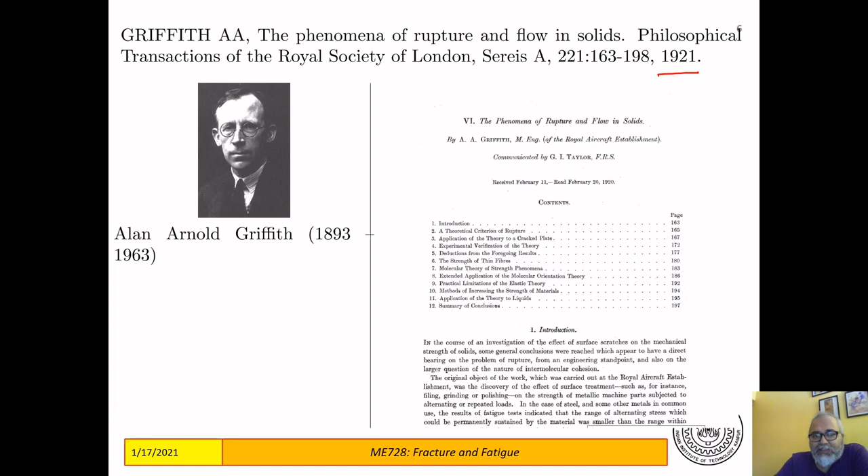Now, Griffith's idea of fracture was based on very simple premises. Imagine you are conducting a uniaxial tension test where you apply a force in the axial direction to a bar which is very long in one direction, with a cross section small compared to its length. Under application of this force, the bar will deform and elongate in such a way that its total potential energy is a minimum.

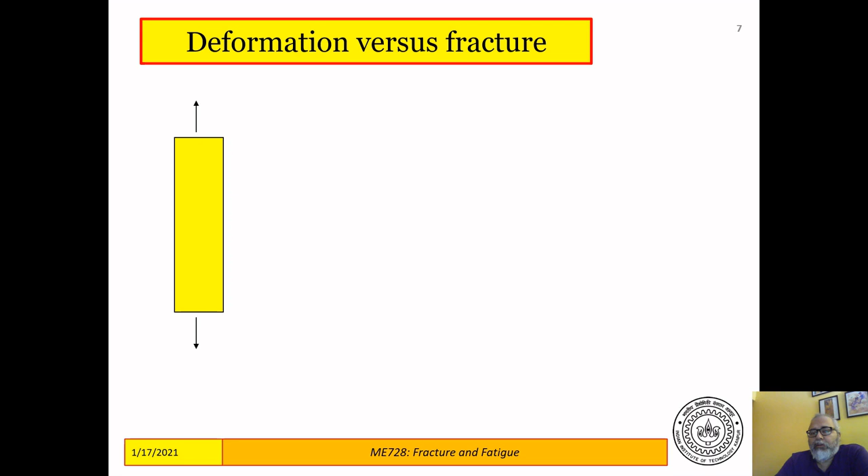Griffith suggested that this bar, instead of deforming, may form a crack if the energy required to form a crack is less than the energy required to deform it without forming a crack. Energy required to form a crack means two new surfaces have to come up inside the material, and formation of these two new surfaces requires some energy. So the energy required to form these two surfaces has to be less than the energy required to deform, in order that the crack can be formed.

So his explanation was an energetic explanation, which said that it is energetically favorable for a material to form a crack than to spend energy deforming without forming a crack. If that is the situation, then a crack will pop up inside the material. This is the basic understanding even today: a crack will form whenever it is energetically favorable for it to form, whenever the energy required to form the two new surfaces is less than the energy required to deform the structure.

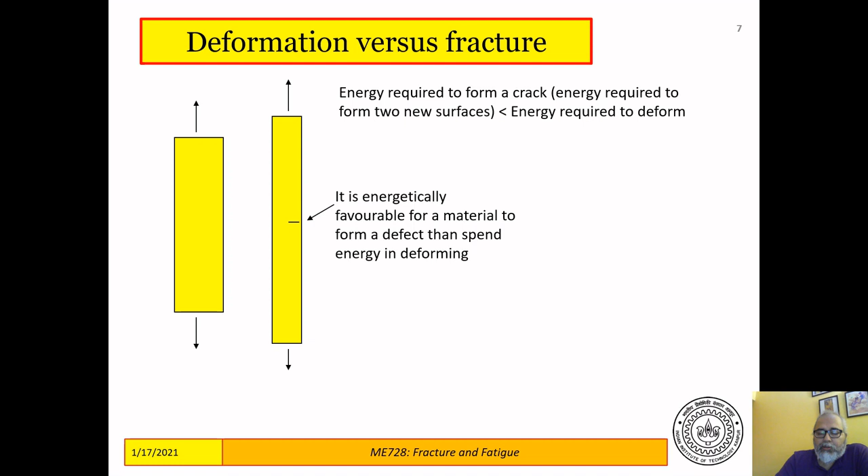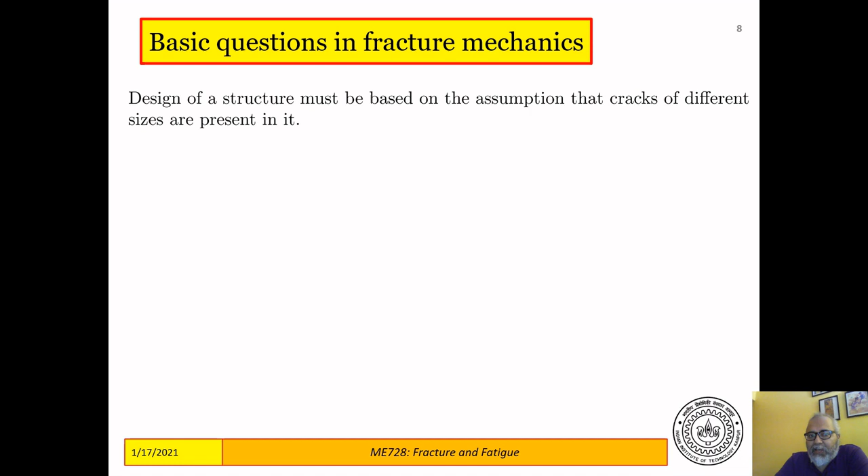In fracture mechanics, we deal with a few basic questions, and these rely on the assumption that every structure has defects of different sizes present in it. You do not have structures which do not have defects; however small they might be, there are defects all over the structure. This is the basic design principle that design by fracture is based on.

Now, the question is, of all the cracks that exist in the structure, will one grow catastrophically, or will all the cracks remain dormant? If all the cracks remain dormant, I don't really care, because it's not going to fail the structure. But if there is one crack in some location able to grow catastrophically, then my structure fails, and I have to be wary of that situation. So if there is one critical crack that can grow catastrophically, I have to further ask: how fast will it grow? And will it keep growing, or will it stop? Fracture mechanics tries to answer these three questions.

Given a set of cracks, fracture mechanics can tell you whether one or more of those cracks will grow. It can also tell you how fast it will grow, and it can help you design strategies that can be used to stop it from growing.

What you will see here is that fracture mechanics basically assumes that defects or cracks are already pre-existing in the structure, and it does not question how those defects came about. So to begin this course, I thought I should give you some idea of how these defects, on which we are going to apply our fracture mechanics, can come about. What I'm going to say is not exhaustive, but these are some of the important ways in which defects appear in structures.

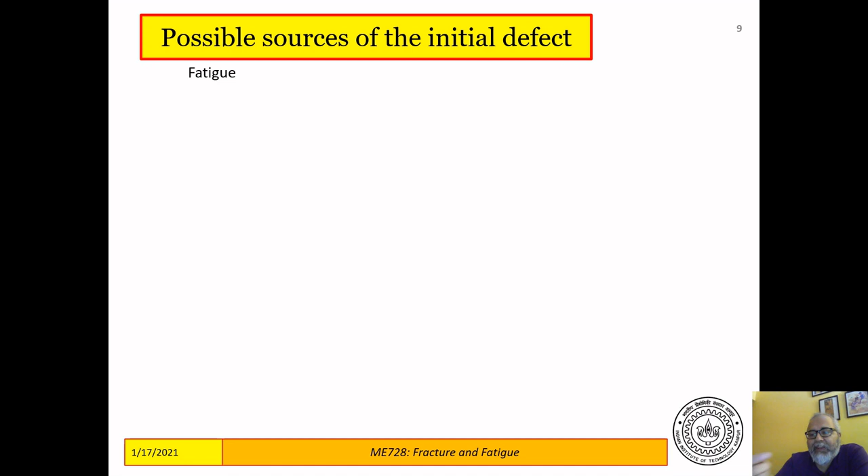So fatigue is one major source. Fatigue, or long operations over cyclic loading, is one of the major sources of the initial defects that ultimately lead to failure of structures. The second major source is aggressive environments.

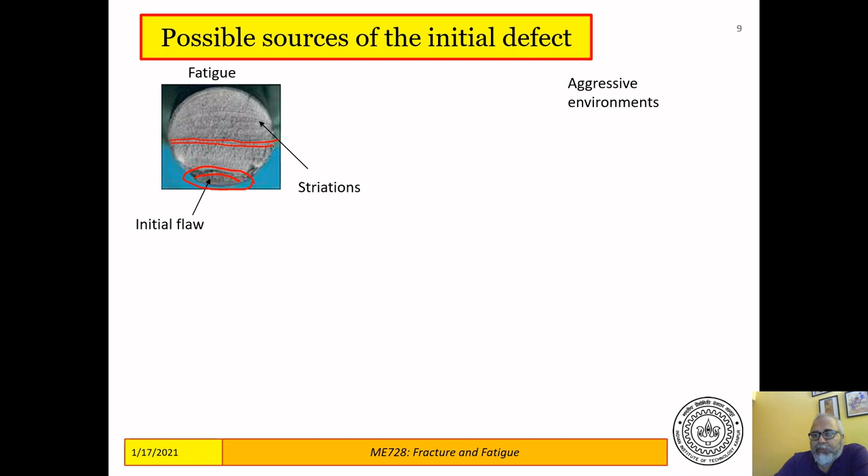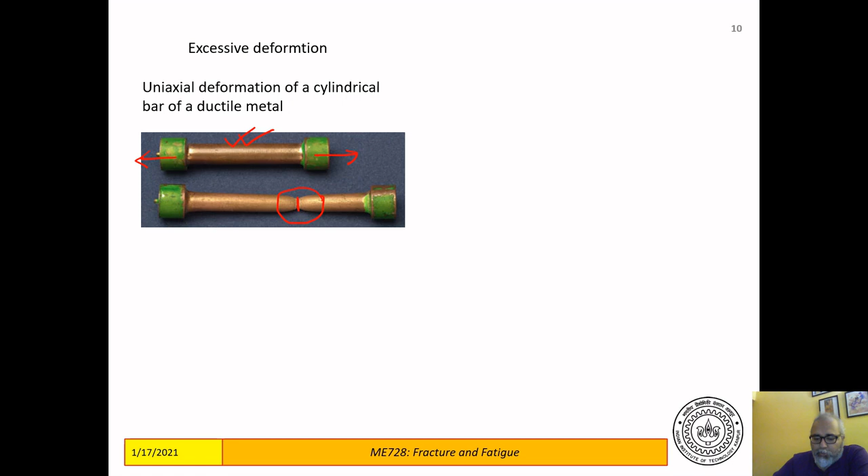So this is the neck, and then it cracks along the neck, it breaks along the neck. This is the experiment that every undergraduate student does in order to obtain the stress strain curve of steel or aluminum, some ductile material. Now if you look at this neck part carefully...

You will see that the two parts form what is known as a cup and a cone. So this part forms the cup, which is actually a depression, and this part forms the cone, which is actually a small hill. So these two fit together. Now if you look at the top view, if you look from here...

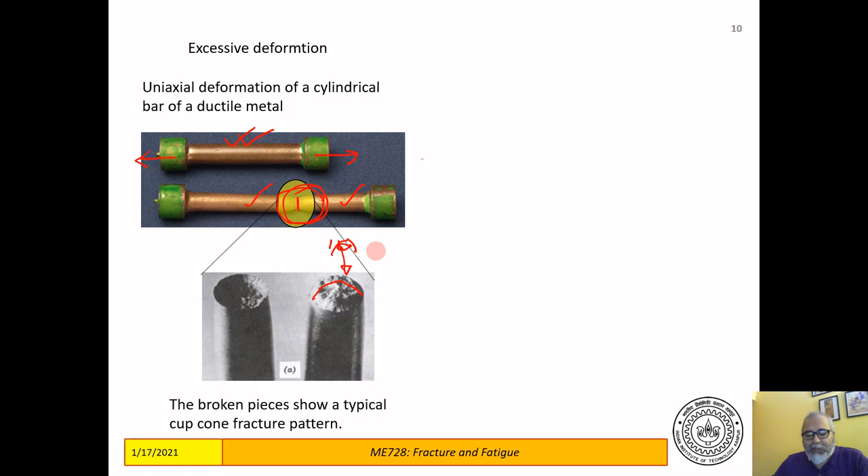Under a microscope, if you look at a small area here, what you will see is a structure like this. This is a typical example of a dimpled structure, very typical - I will show you another example - which is a hallmark of ductile failure. So this is a ductile material, steel, aluminum, copper, and this is a typical close-up of a cup and cone fracture. If you looked at the cone, or if you looked at the cup, you would see more or less a similar kind of picture.

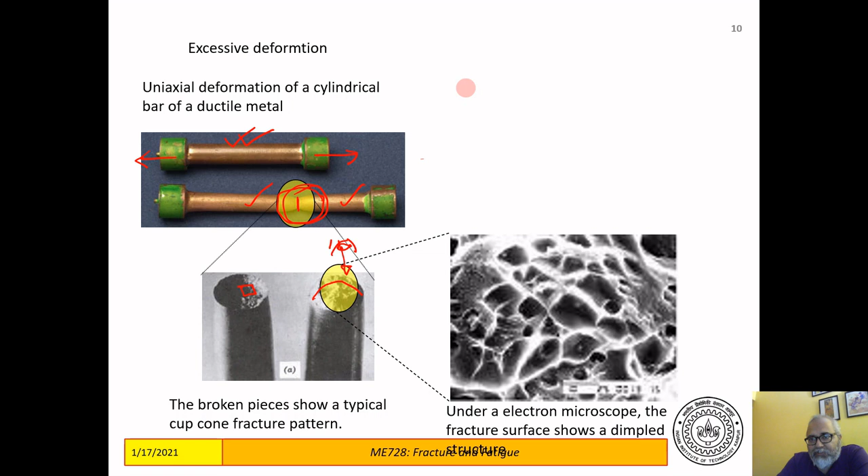These are actually signs of early defects that caused the failure. People have looked at this. What people have done is taken a dog bone, pulled it to some extent, cut it across and looked at the surface, then taken another one, pulled it some more, cut it, looked at the surface, and doing this they have pieced together how this particular process happens. It happens along this route: you have the start of necking, which is an instability phenomenon, in this region, as you're pulling like this.

When it starts to neck in this region, the stresses are very high, which gives rise to microscopic voids. These are very small voids. Then some of these voids are actually represented by these dimples.

So these dimples are depressions. The black parts are away from you, the white parts are towards you. So you can imagine this is like half of a hollow sphere, and the other half would be somewhere on this surface. So these two would fit to form a complete sphere, which are the signatures of these voids that have formed.

Then some of these voids might coalesce to form a bigger defect, and then this bigger defect, if it's big enough, can grow, can propagate. That's where fracture mechanics comes in and causes failure.

So this is the initial defect from which fracture mechanics would start to operate, but this defect comes through the formation of voids: void nucleation, then void growth, then voids coalesce, and finally a large enough coalesced void would propagate to form a crack which will lead to failure.

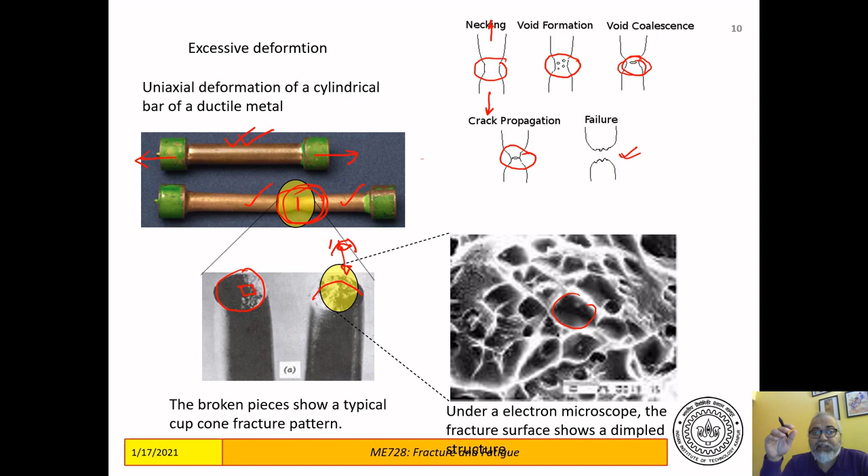Now, there are some inadvertent ways in which the defects come about, and they have to deal with poor design and manufacturing processes. So your design may have stress concentrators, which would be regions of very high stress where defects can form.

Poor material selection might lead to defects. Defects may be induced by the manufacturing process itself, cutting or forging or improper heat treatment, and defects may also result from faulty assembly of components. So these are some of the inadvertent ways in which you can introduce defects in a structure.

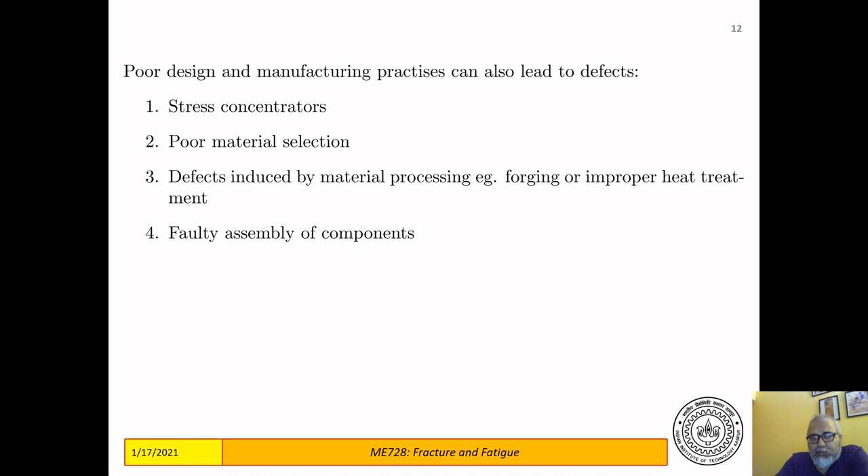And let's look at a case study taken from this paper, and this is on the axle of a railway.

So we need to know, as I said, what is the size of the defect that we will start from. We are not going to look into how the defect came about, but we need to know what size of initial defect we are going to consider.

Now, the size of the initial defect will be determined by, and this is a design practice, the smallest size that you can detect with the inspection methods that you have at your disposal.

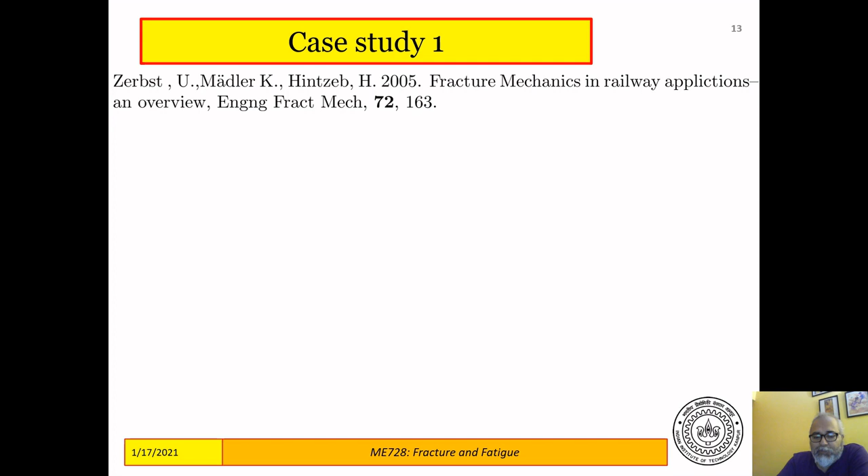For example, in this railway application example, these are some of the processes. You don't need to really worry about what these processes actually do. These are some of the processes by which you detect cracks in a structure. So you have these railway axle, wheel axle assemblies, and there you use one of these methods to detect whether it has a crack or not.

And each of these methods will have a resolution. That means there would be a smallest size of the defect that it can reliably detect. For example, if you take ultrasonic testing, then the probability of detection is almost 1 once the crack size reaches a depth of about 6 millimeters. So anything above 6 millimeters would be definitely detected if you are doing ultrasonic testing.

Now, in that case, when I do a fracture mechanics based design, I should always assume that there are defects of size equal to or less than 6 millimeters in the structure. So that's the starting point of my fracture based design.

If I do something better, like magnetic particle inspection, then I have a 100% probability of detection if my crack is, say, like 3 millimeters. And in that case, I have to assume that the structure always has cracks of size 3 millimeters or less in it. And then I have to ask those four questions: whether these cracks can grow, how fast they will grow, whether they can be stopped, and so on.

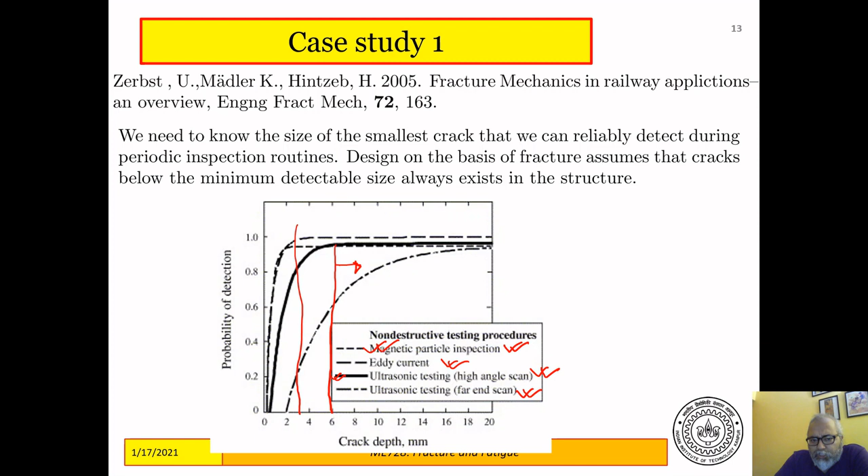In conventional design that we have learned in our undergraduate days, the basic premise is that we have to design in such a way that everywhere, the stresses at any point in a component does not exceed the yield stress. So stresses cannot exceed the yield stress, or some combination of stress like the von Mises stress or the Tresca stress, based on some criteria, should not exceed the yield stress.

Fracture mechanics based design asks a different question. It asks, assuming that there are defects in the structure, what is the load at which this defect will start to grow? That is my limiting load. Whereas in conventional engineering design, which is also called yield based design, the load should be such that it does not cause yielding at any point in the structure.

If, for example, your detectability limit tells you that the cracks are of this size, then fracture will not happen, and your structure will fail according to the concepts of fatigue and yield at the endurance limit of the material. So it will fail at the endurance limit. If your crack lengths are of this size, then it will fail under linear elastic conditions.

That is what we are going to learn next. LEFM means linear elastic fracture mechanics. So it will fail in this region, without causing much plasticity in the material. It will fail according to linear elastic fracture mechanics conditions, but that you see is much lower than the endurance limit.

For the endurance limit to be valid, for the material to fail by yield, your crack lengths have to be smaller than this. If your crack lengths are bigger than this, you will fail by fracture, but fracture will not cause much plasticity. Whereas if your crack lengths are in this region, you will again fail by fracture, but you will cause EPFM, elastoplastic fracture mechanics, to come into the picture, and your crack propagation during failure will cause a lot of plasticity.

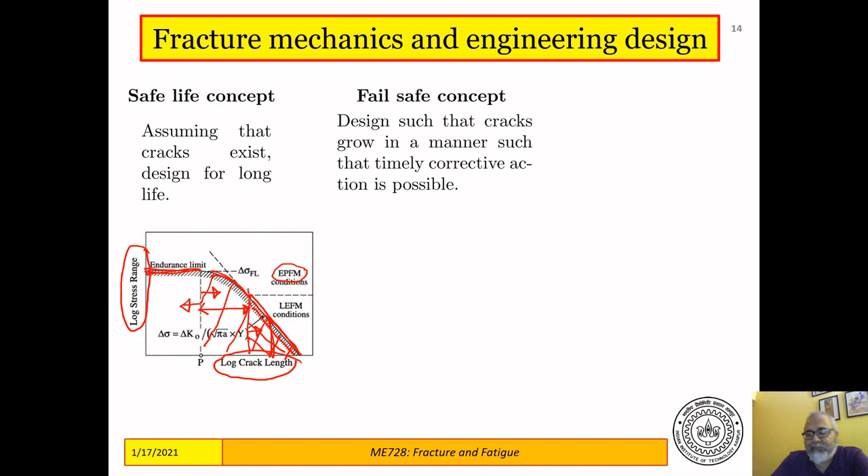The fail-safe concept suggests that you design such that cracks — small cracks below my detectability limit — are allowed to grow, but in a manner so that timely corrective action is possible. In other words, let the cracks grow slow enough that I can detect them and take corrective action. This is the concept of fail-safe, fracture-based design.

Another variant is that small cracks are there, they also grow, but whenever they try to grow, I sort of guess where they are trying to grow from, and then I try to arrest the crack, to stop it from growing before it causes complete fracture. I can do this by modifying the material I'm going to use, and also by clever design of the structures, by adding what is known as crack arresters, which are present in several structures that you see around you.

So these are the three major concepts of design based on fracture. There's of course another brute force kind of concept, which is the damage tolerant concept. Here you do nothing, but you just do routine maintenance tests, overload tests, and remove cracks as when you see them.

You either patch them up or fill them with something whenever you see them. So this is kind of a brute force approach, which we are not going to talk about much, but a lot of the industry probably uses this. We are not going to talk about this. Our concepts would be like the safe-life concept — so how can we limit our loads so that cracks never grow.

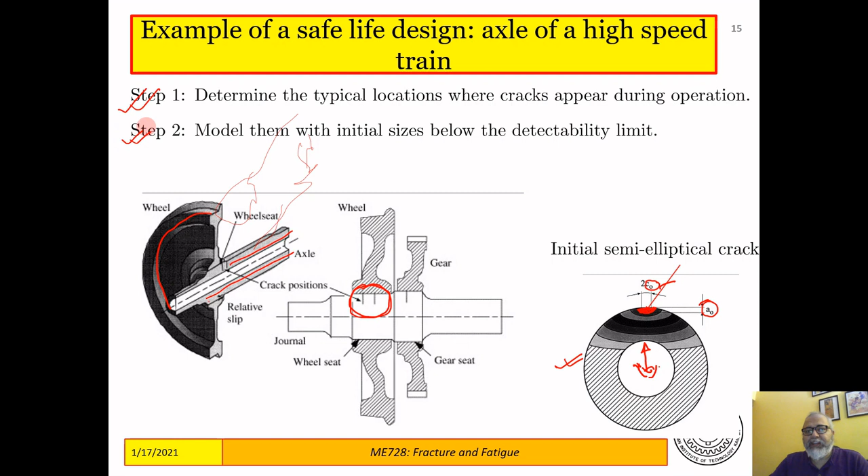Now I can do this to wheels as well. So the second step is to model them with initial sizes below the detectability limit. The next step is to consider physical conditions that the crack might be subjected to during operation.

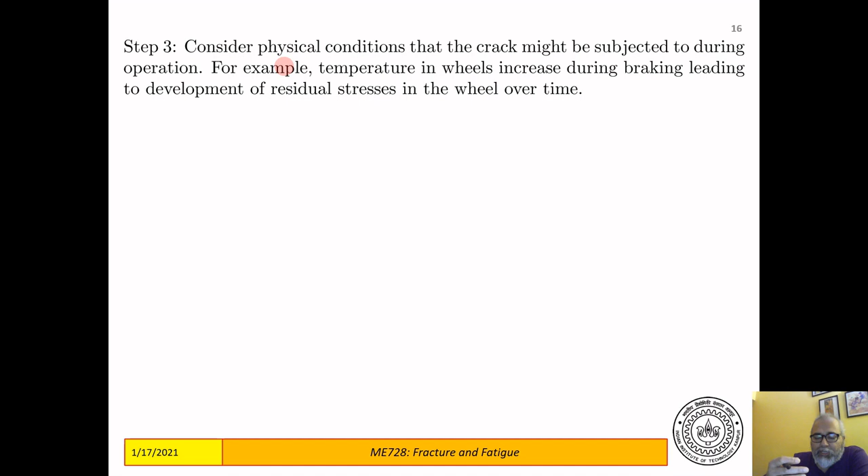Let us shift from an axle crack to a crack in the wheel. If you look at a wheel, it is subjected to huge temperature rises whenever the train brakes - remember this is a high-speed train. Whenever it brakes, the temperature at the contact between the wheel and the rail increases tremendously, going up to 400, 500 degrees centigrade. This has to be taken into account. This is an operating condition that happens for a short duration during braking, but it has to be considered when designing the wheel.

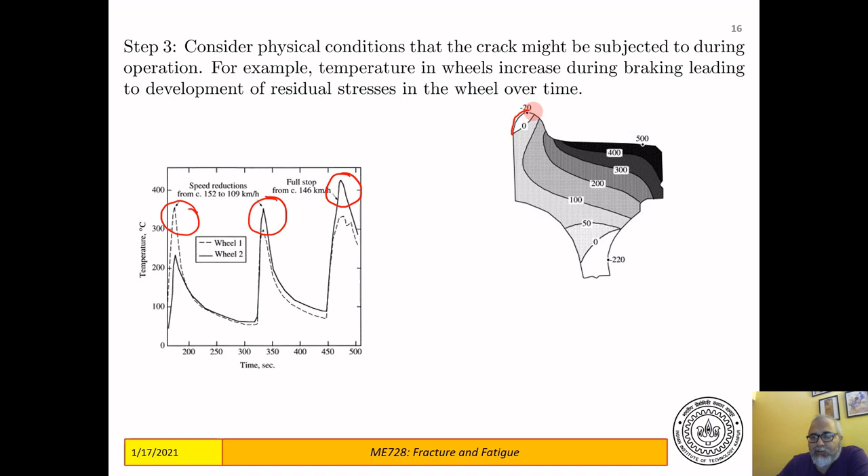This happens at the rim of the wheel where it comes in contact with the rail. So you do some kind of analysis, maybe finite element analysis, to figure out that if you apply this kind of friction force as in braking, what is the temperature distribution in the wheel. This is the rim of the wheel, the part that sits on the rail - the rail comes somewhere here. It's upside down actually. At this location, whenever it brakes, you see the maximum temperatures are attained here.

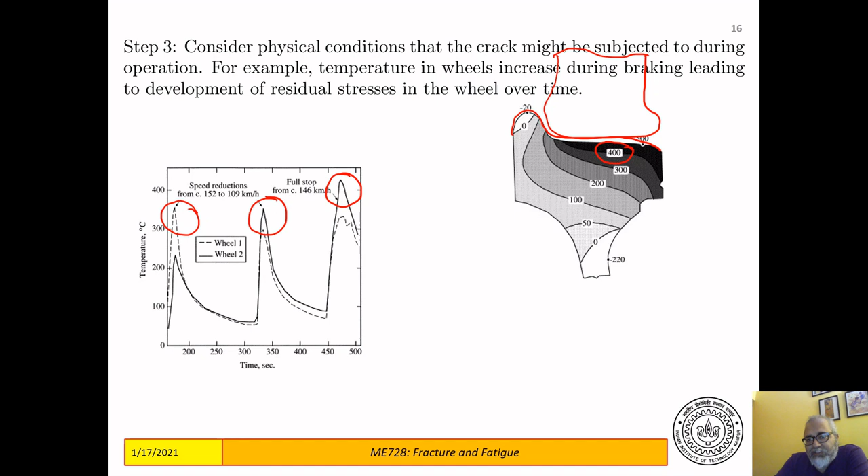This is the region where you must put your cracks, because this is where the largest amount of thermal expansion takes place. Once you have learned this, you put cracks on different parts of the rim - here, here, here. These are different kinds of cracks, but all semi-elliptical cracks. Then you study how each of these cracks is going to grow.

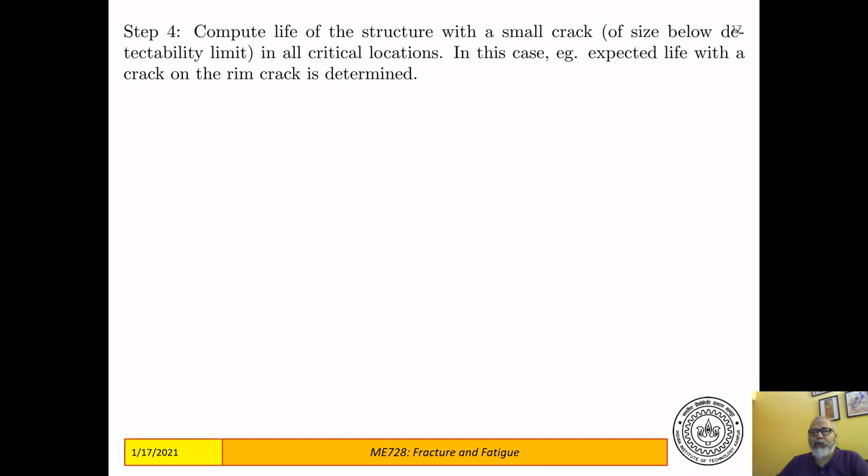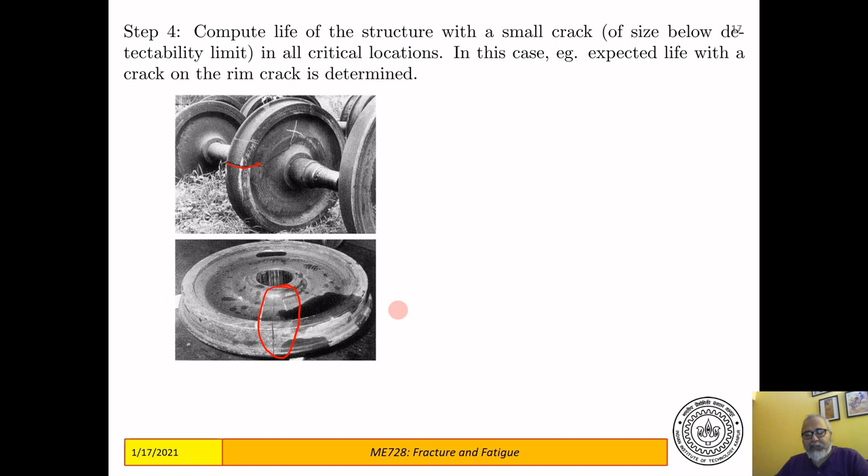This is the last step in the design - step 4. You try to figure out how these cracks grow. For example, this is a wheel that has a rim crack here and is growing inwards. I need to know when it reaches the inner hub. To do that, here is another view - this is the crack after it has reached the inner hub, and what you try to do is a calculation like this, for a crack which started from here.

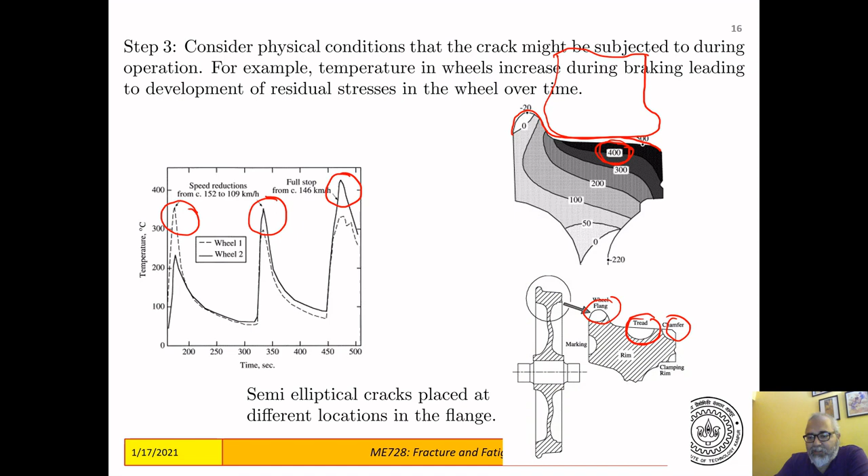So this is again a semi-elliptical crack from this location, called the tread location, which comes in contact with the rail and has a very high temperature. So you put in this temperature rise and the frequency of braking, etc., and then you try to see how this crack grows, and we come up with these kinds of diagrams.

We will learn a bit about how to handle each of these steps in the course of this, what we are going to learn here.

And let me turn to a slightly different topic, which is fractography. This is something we are not going to talk about much later. There's a lot of post-mortem that you can do on broken surfaces. Broken surfaces actually tell us a lot, and there's a science behind it called fractography. Fractography is basically the science of reading fracture surfaces, a post-mortem technique. You might want to investigate why a particular failure happened by looking at the broken pieces, and you can make a bit of progress using the science of fractography.

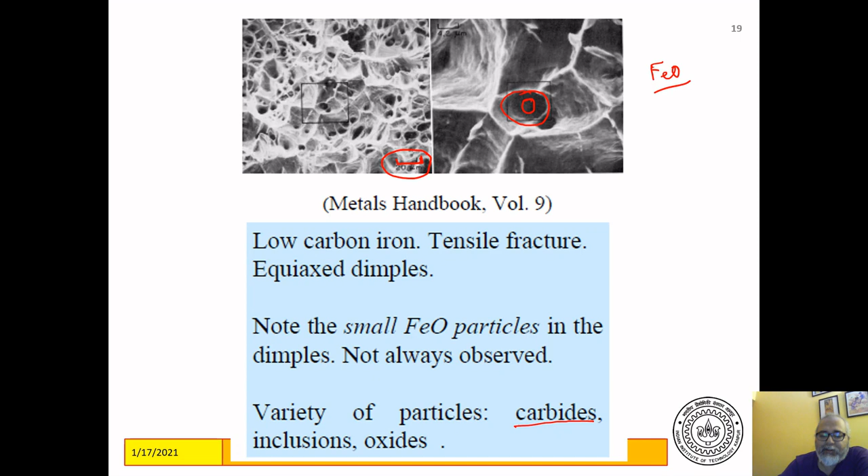You can see the length scale here. The length scale of this picture is 200 microns, visible here. This is even smaller, so these are very microscopic length scales. At these microscopic length scales, what is happening to cause the fracture is sometimes revealed by fractography.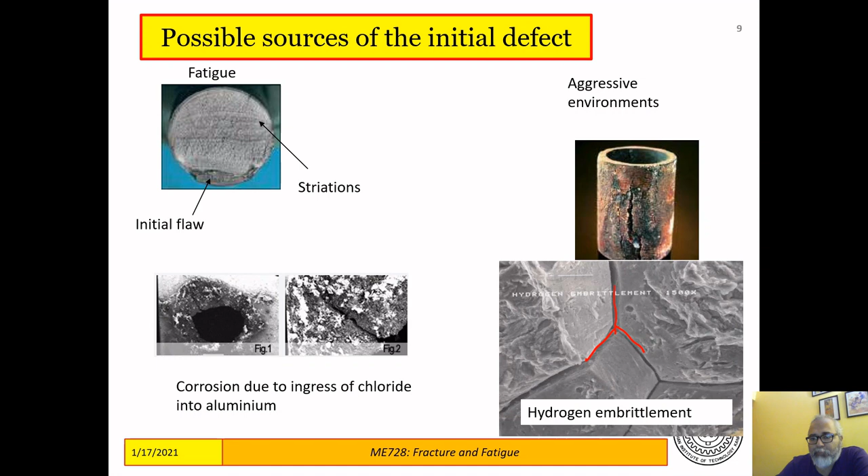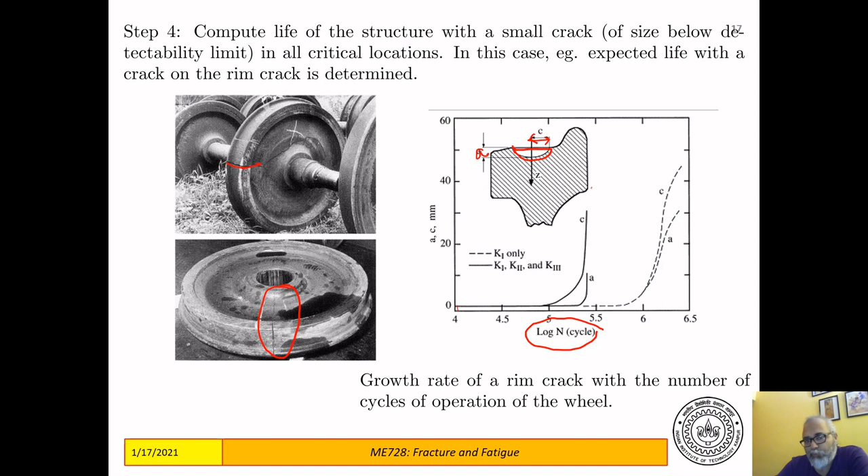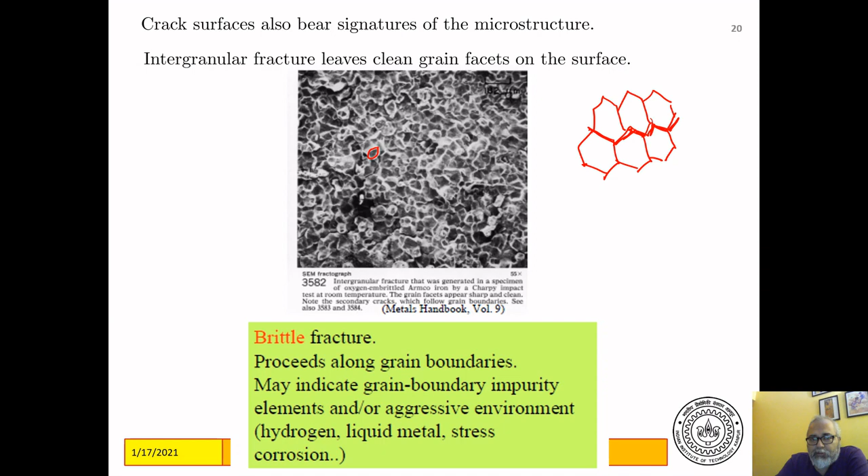That tells you two things that we probably won't have time to discuss in this course. The first is why the initial defects exist - I have given you some reasons that justify why these initial defects exist. The second is the reading of fracture surfaces, which is a growing, developing science, and now there are quantitative techniques available to read fracture surfaces, with a lot of work being done in this area.

This is something we are not going to cover in this course, but I wanted to give you a feel of the fact that just by looking at fracture surfaces, you can do a lot of post-mortem analysis and try to tell what exactly caused the fracture - not always, but many a time.

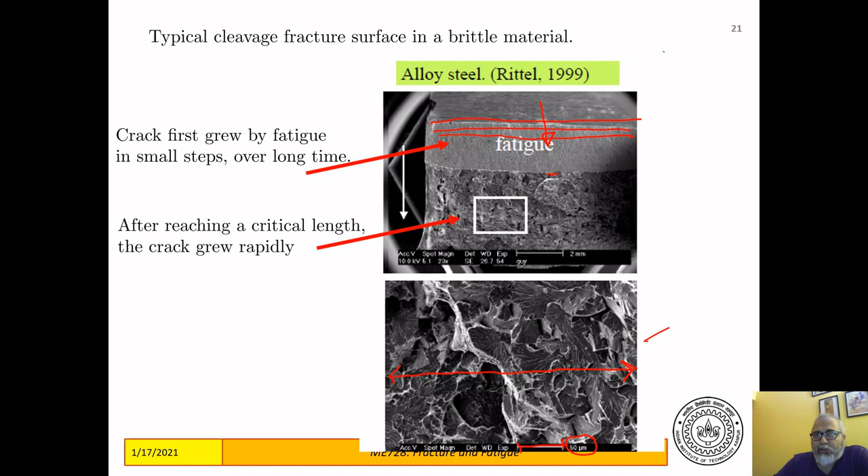One thing we are going to keep in mind and use quite a bit among the things I talked about are these concepts of fracture based design. These three concepts of fracture based design we have to keep in mind and put everything we do from now on in this perspective. Everything from now on, we are going to shift gears in a big way, and things are going to be mathematical. But we have to position these mathematical concepts in terms of the design ideas that fracture mechanics offers us - these are alternate design ideas that fracture mechanics offers, and we have to keep them in mind.

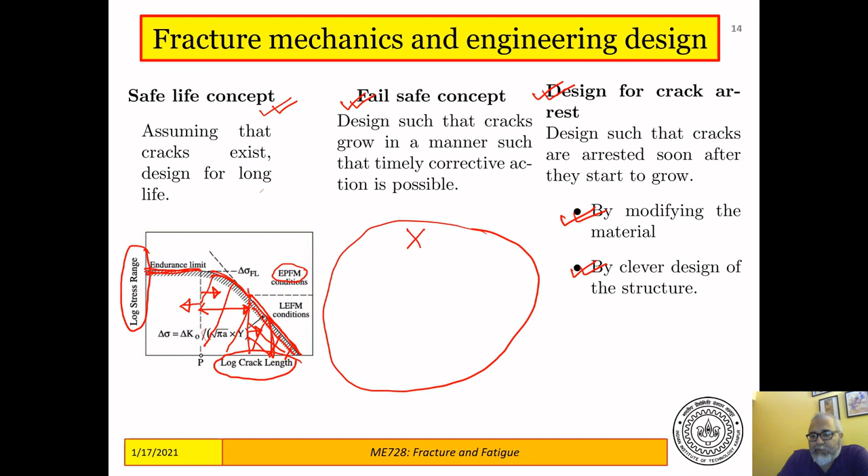So I'll end this lecture here. In the next lecture, we will look at the elastic fields - elastic stress, strain and displacement fields - at the front, at the tip, of our sharp crack. Let me stop here.